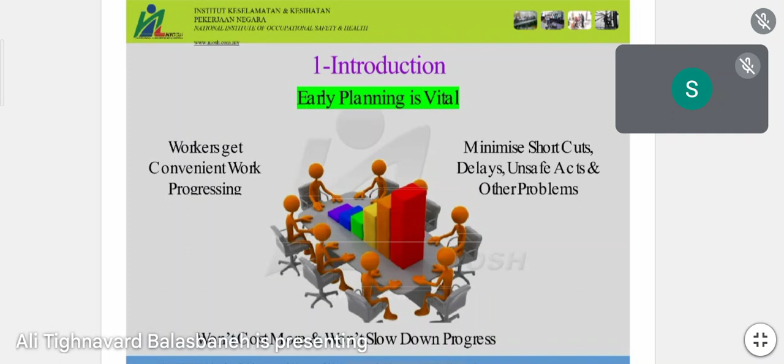Section 4. Okay. Do you have any class, not today, during the weekday that starts at 8 a.m., or no? All your classes start at 9? Yes, please, somebody answer the question. Don't be shy. It's simple. Mostly 8 a.m. Today, do you have any class at 8 a.m.? No, it is my first class. Oh, okay. Today class starts at 9. Thank you.

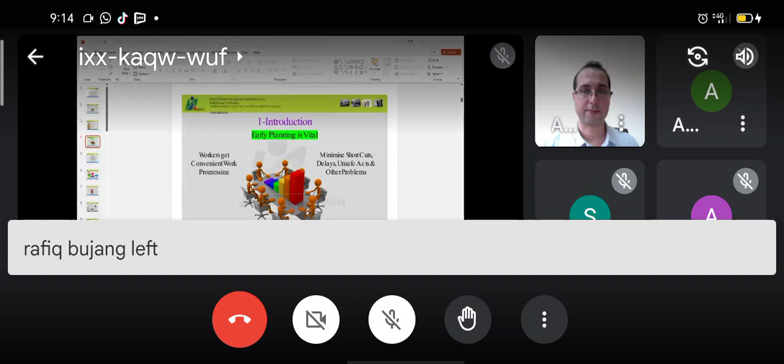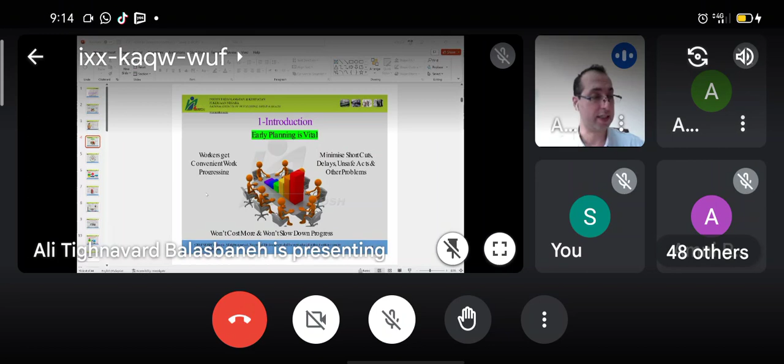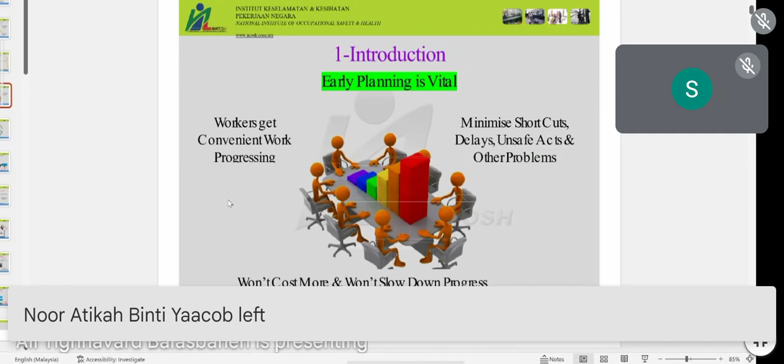So, for that interruption, let me start over and tell you what we are actually discussing. Well, if you review last week's notes, you already must know that we discussed some introduction of the organizations related to safety and health in the industry, in the workplace. And last week, we just had a slight view of safety in the construction industry.

So we tried to focus on the building because OSH is very general. It covers anybody who works, anybody called a worker. It doesn't matter if they work in the construction industry, petroleum, steel factory, or any other jobs. Those fields, like petroleum, are not really in the knowledge we study in the university, but building, yes, it is.

So therefore, we want to focus today on how OSH operates in our field, who is responsible, and at which stage we should apply the OSH rules or OSH instructions. This information can help you in your future job, so you can be more successful. And that's our purpose in attending this class.

We're not just here to review some PDF file or notes, get some marks and graduate. Either way, I believe all of you will graduate. But if you graduate with more knowledge, not just passing your topic, you have a higher chance to become a successful engineer, or whatever job or responsibility you have in the future. You can be more successful.

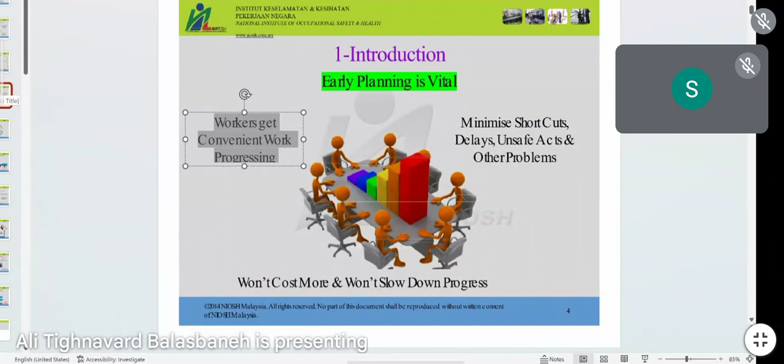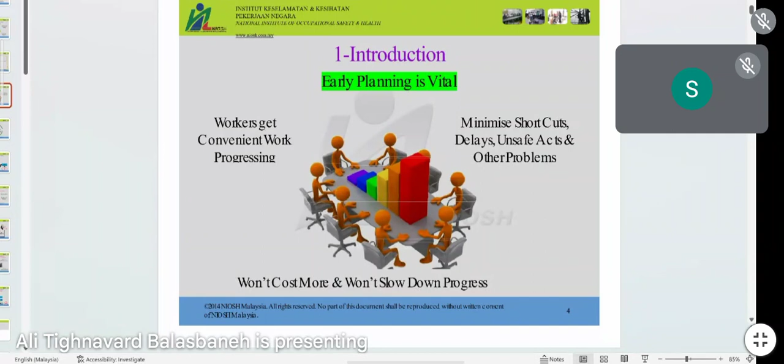There are some advantages when we apply these rules at the very early stage. First, the workers will have more convenient progress in their job, and it can minimize delays and unsafe activity. These are the advantages when you have early planning.

I just want you to think bigger. We don't make early planning only for OSH. For so many things we need early planning, okay? For example, for the procurement process. I hope you all know what the procurement process is since you passed the sustainability subject. Or for applying sustainability strategy, everything in the construction industry needs to be applied in early planning.

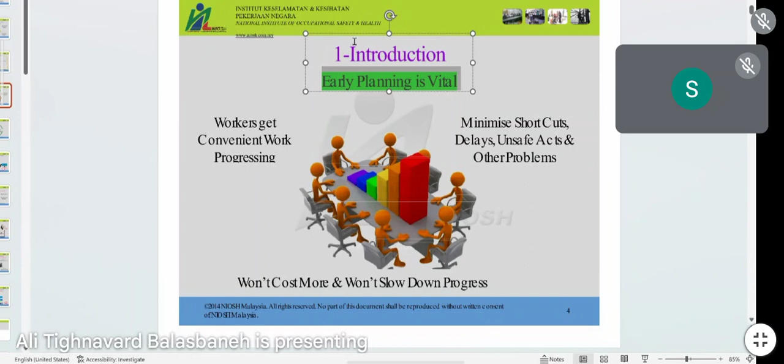So now I have a question for you. How do you think neglecting the OSH can affect time? Shouldn't we save time, or shouldn't we make the project faster because we are not following so many things that create barriers in our work? Like, if you apply some rules, it takes time. Why do we believe that if we don't follow the OSH, we can save time?

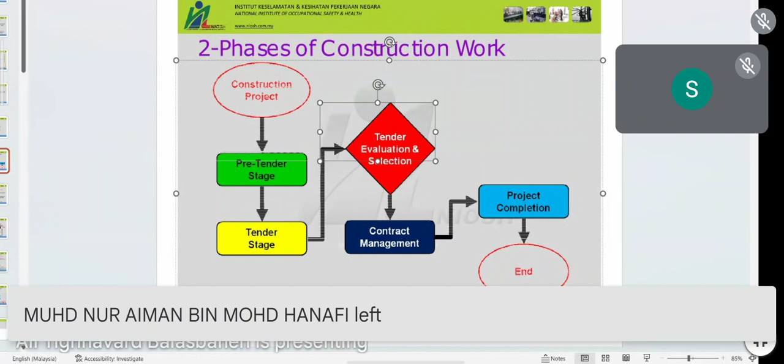We don't know, it depends on the city, how many companies exist in that city or country, and how interesting that project is for the company. Maybe 50 or 100 different companies are bidding for the tender. So what is our criteria to select that contractor? Because we need only one contractor, and it's very challenging to choose one out of 100.

Our criteria should be very specific, very clear, very vivid, and the people who make the decision to choose that contractor should be well experienced. We don't choose the contractor just because maybe we like the company name, right? That has nothing to do with the competency of the company. We don't choose the contractor because they have a branch in our neighborhood, we see each other and we are shy to choose somebody else. No, this is not the criteria. Our criteria should be professional.

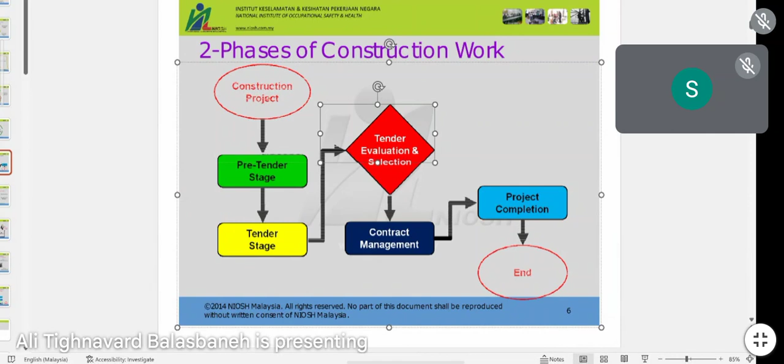Or the current project we have is very unique. You decided to apply many sustainable strategies. You check their background. Did they consider any sustainable strategy in previous projects? Are they familiar with sustainability or not? So many other items. So imagine we choose our contractor. Then we sign the official document with that contractor, and the process of construction is finished, done. So we can say the project is done.

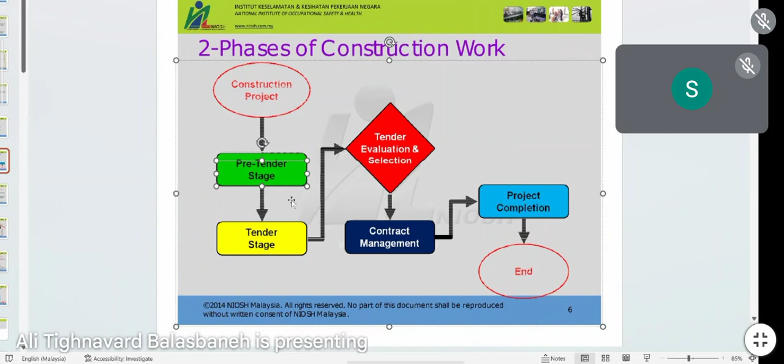But let's go back here. We want to prepare the tender. We need some documents before inviting the contractor to bid for the tender. What do we need here? We need all design information. We need appropriate drawings to show all the details of the building. What I mean by all the details, it must show exactly the size of every component of the building. If we design the balcony, it must show the dimension. For example, the dimension is 120 centimeters to 150 centimeters.

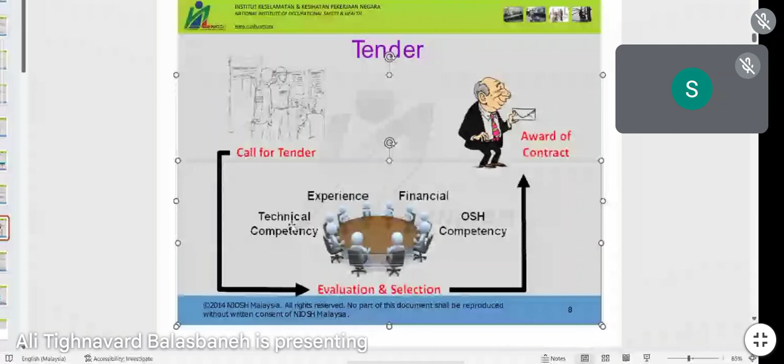Why do we need to deliver this information? The companies that want to be nominated as the contractor need to calculate exactly how much this project will cost. So we call for the tender, then we go through the evaluation process. You can see there are so many items that contribute to the decision, and one of them that we discuss today is OSH competency. And then we only award one contractor.

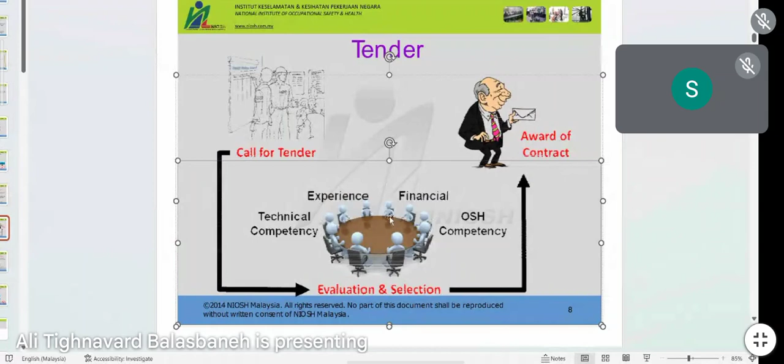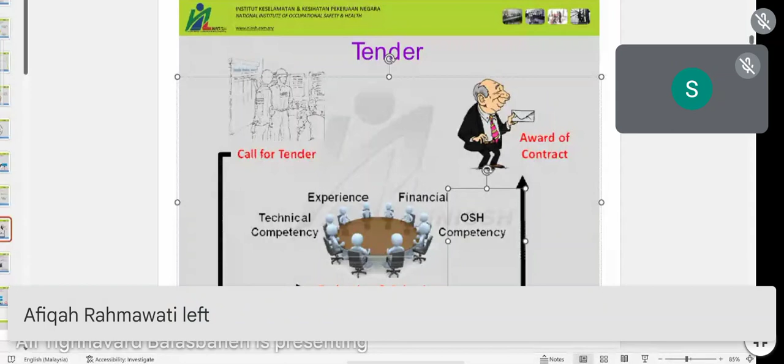So let's go back here. We check their experience, we check their financial background and many things. And also one of the items we need to check is how many accidents this company had in their previous projects. How many times accidents occurred while they were working as the contractor? That can show us as proof whether they are following the OSH rules or not. You see?

For every purpose we have, we need to look for that in the contractor candidate's background, because they will submit their CV. In the CV, they will mention how many successful projects they have previously done, the characterization of each project, and what they did in the previous project.

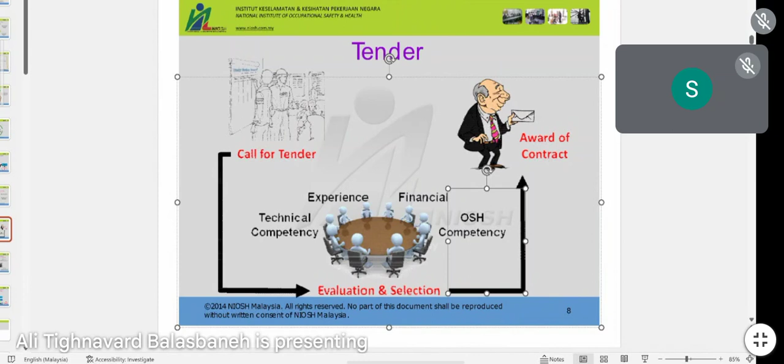So one of these criteria, why we came here, I want you to think bigger. Why did we come to check the phases of construction work? We want to understand where OSH is located here. We will study OSH for 14 weeks. So many hours we will spend. This is what we need, we have the right to know. Where is OSH located in my future job?

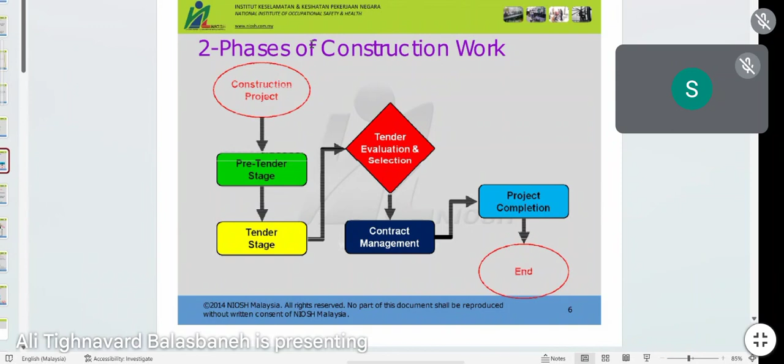If this is only a subject I need to pass and nobody cares about it in the future, then you're wasting your time. But I assure you it's not like that. Okay, so this answer is done: yes, I need it in the future. But the next thing you need to know is exactly at which stage, or in how many stages, I need to know about OSH. So remember that very well.

In the future, if you want to become a contractor, maybe not in the first year, maybe not in the first 5 years, but eventually, if you want to become a successful engineer, you become rich. One of the ways to become rich is to become a contractor. So remember that if you become a contractor, your safety background will be checked by the team, including the contractor, project manager, and so many people. So from the beginning, you must try to have projects with no accidents, or as few accidents as possible.

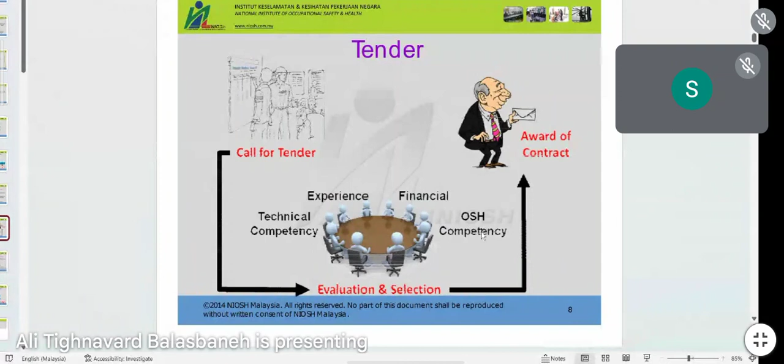Then the contract management, execution of work, this is the stage where the safety rules must be fulfilled completely, with supervision of the safety rules every single day. It's not enough if we claim, I'll check the safety once a month. This is wrong. Or you say, I will check the safety once a week.

This is also wrong, because there are so many activities ongoing on the project. Some of them might have a low risk of accident today. Other activities might have a medium risk of accident today. If you check once a week, in the next 4 days, the one with a medium risk might already turn highly risky, and an accident happens before you have a chance to check again.

So, what is the conclusion? The monitoring for safety should be every day, and you will have a list of all the work, and you will take notes. Okay, this task has low risk. Another task has high risk. Then for the one with high risk, you should have an immediate solution to rectify that risk.

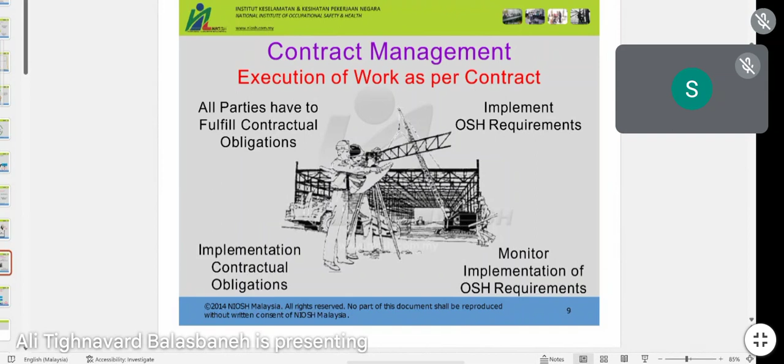Now let's continue. The contract management. There are some typical activities that we can find in any work or project. Let's see. Preliminary works, which we will discuss later, substructure and superstructure, M&E installation, and finishing of the project. Finishing means completion and end.

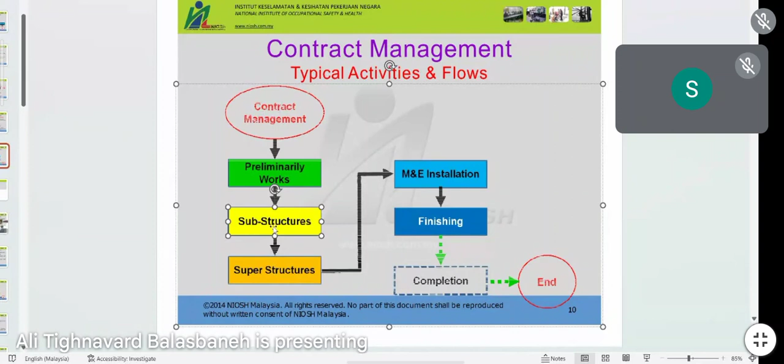So, one question I have for you. What is the substructure, and what is the difference between sub and superstructure? Anybody have an answer? Please share with the class. Substructure is from the foundation and below. Superstructure is above the foundation until the very top floor and roof. Okay, thank you, Zahro. Very good.

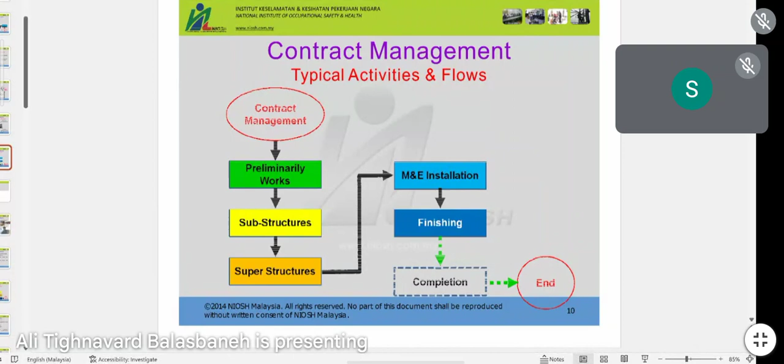So, let's check together in one tutorial and see the full difference between these two. InsyaAllah.

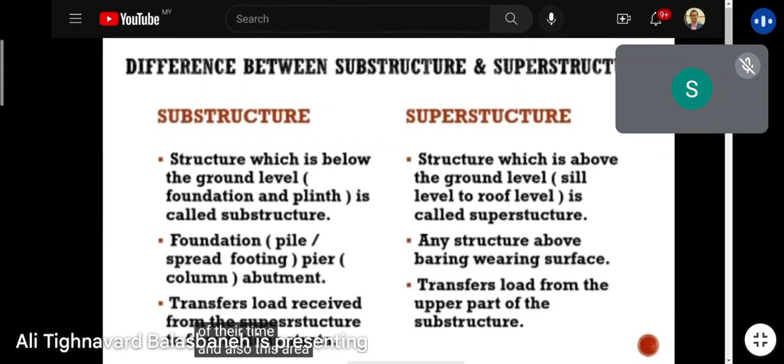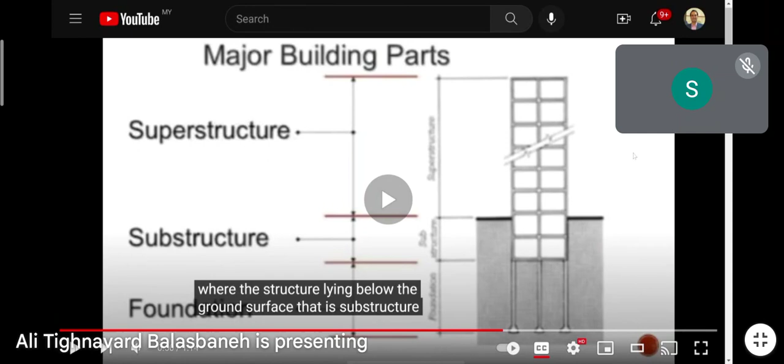And the structure lying above the ground surface, that is superstructure. The last one is examples of substructure and superstructure. The footing. Okay.

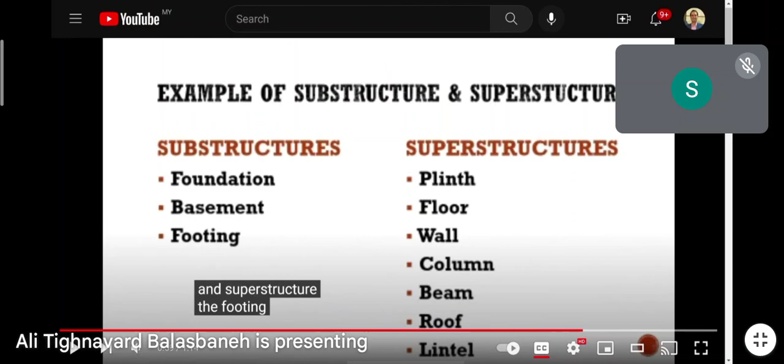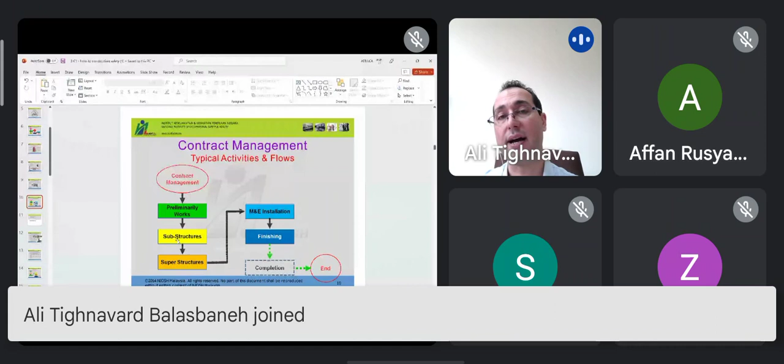So why? Some of you might already know the difference between substructure and superstructure, but this is not what we want to discuss today. We want to know why we have to separate substructure and superstructure in the OSH topic. The answer is very simple.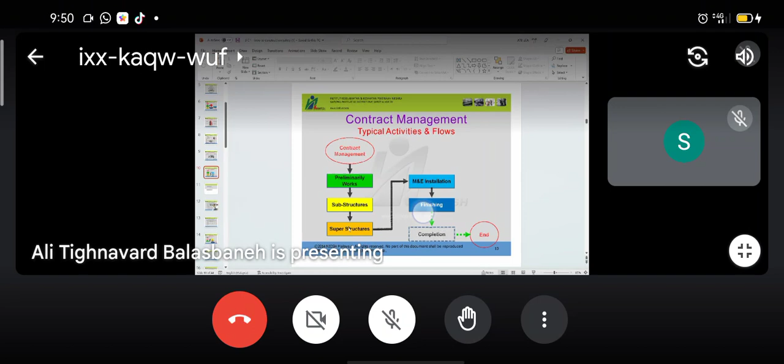The procedures to apply safety on the substructure are different from the safety procedures that we apply during the superstructure. This needs to be considered carefully during the project. We cannot finish a 20-story building with the preliminary safety rules that we applied for the substructure until the end of the project, because when we enter the superstructure stage, it requires another strategy to apply safety.

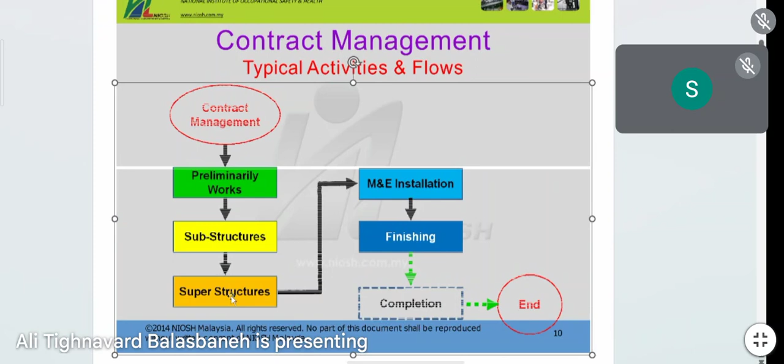So there are differences in the contract management. There is different equipment and machinery that needs to be used, such as the excavator. This is what we call an excavator. Piling rigs. We just saw the piling in the video tutorial, but this is the machinery. And the bar bending machine.

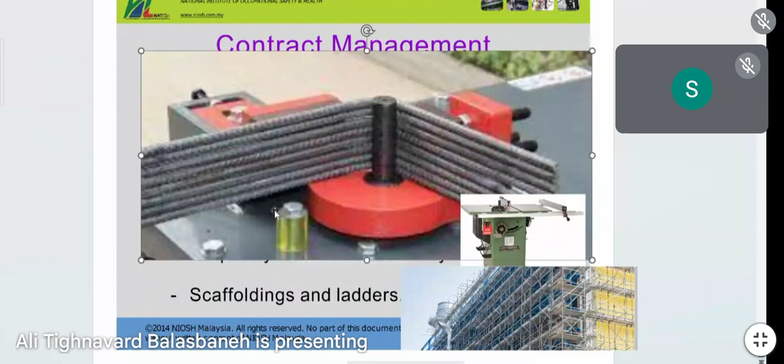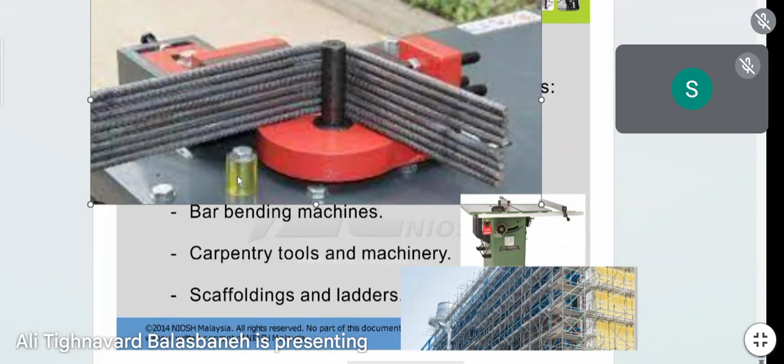Long time ago when I was very young, I remember I saw one project. They did not have this machine, and they bent the bars physically by human workers. That could be done in a small project, but in a heavy, big project, they must have this equipment. Carpentry tools, and scaffolding.

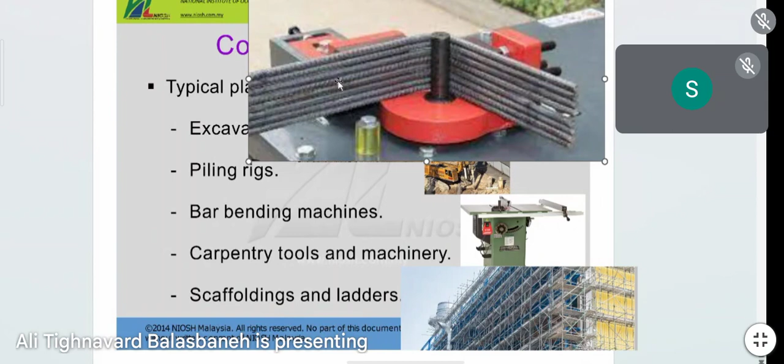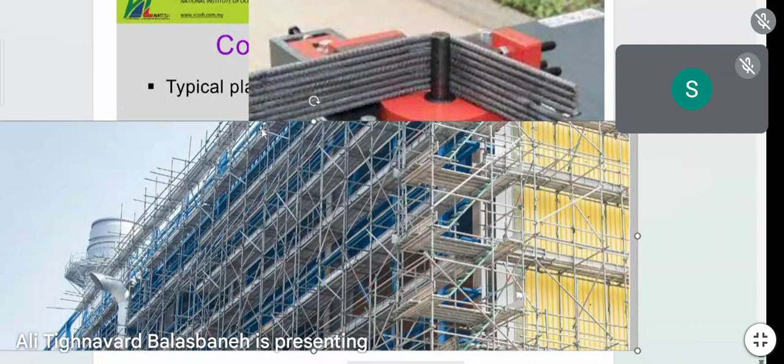So, you might already know what the excavator or other things here are. The purpose of this slide is to make you familiar. For different equipment, sometimes we need different safety procedures. For example, bar bending mostly contributes to injuries to the worker's hand. But scaffolding doesn't only cause injury to the hand. Some workers fall down from the top story, and they have other injuries waiting for them.

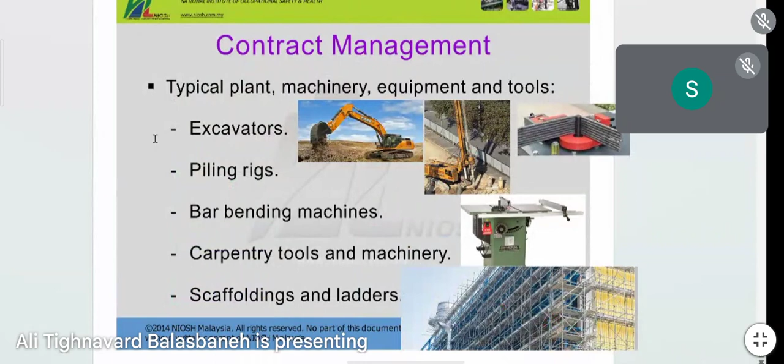Other items you can see here: crane, batching plant, concrete mixer. The rules apply for all of them. Typical activities and their flow. So imagine we apply all the OSH rules and the project is finished. Then we enter another stage, which is testing, handover, the defect liability period, and close out. This liability is related to the stage where you, or whoever is the contractor, must rectify any problem that appears in the project.

For this liability, I cannot tell you exactly what the duration is. Maybe 6 months, maybe 2 years. Why can't I tell you? Because it depends on the contract. But regardless of the duration, now you must know what this defect liability period is.

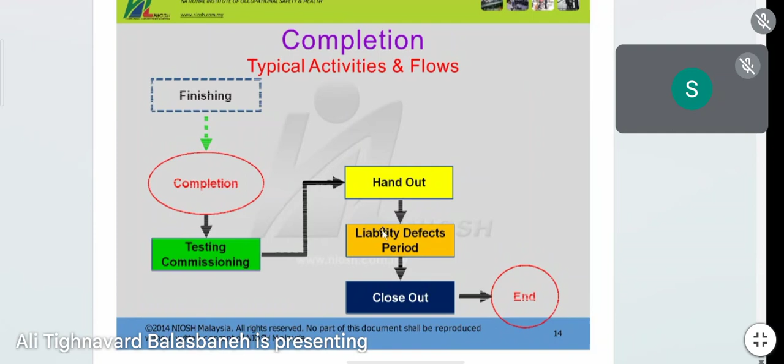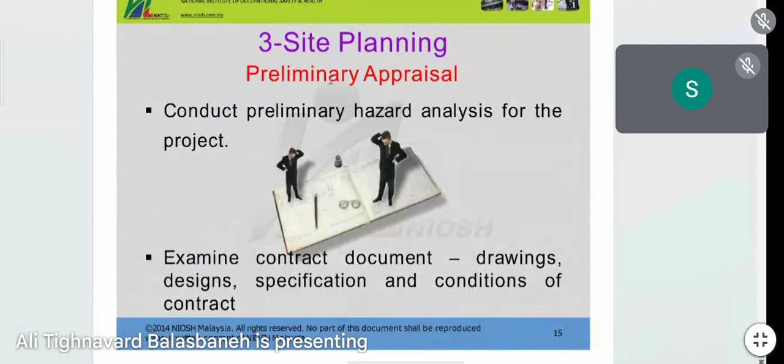Preliminary appraisal: conduct the preliminary hazard analysis for the project. When they do that, examine the contract documents, drawings, design, specification and conditions of the contract. Site planning, before I forget, is the third topic that we discuss today. There are so many issues related to site planning, as you can see here.

For example, the operation comes with a high risk. You need storage for keeping the material safe, not only from the weather condition, for example, rain can spoil the cement or any equipment and machinery, but it also needs to be safe from stealing. Requirements for site security, logical sequence of work, and other things like capacity of plant and equipment.

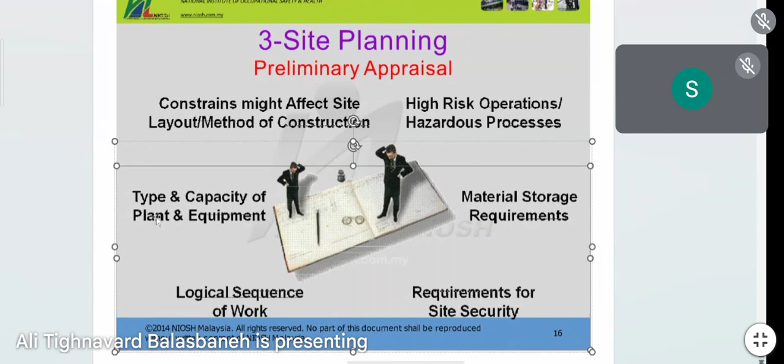So, when we talk about site planning, imagine this is your site plan and see yourself working in the future. The area where the building is constructed is just this square. Take a look here. But around this building, you have a big space that is considered the construction site. Inside this construction site is the space you need to handle all your work or anything needed to construct this project.

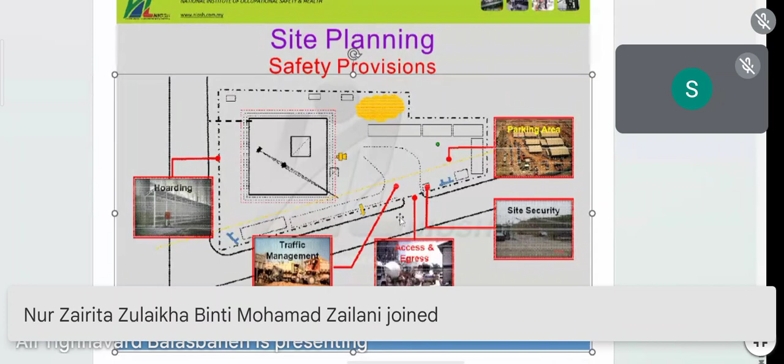Some of these items are already mentioned here. For example, the parking area. Take a look here. The red dot shows where the engineer, project manager, owner, or whoever wants to visit the site can park the car. This is the gate entrance. And this is the main street. Next to the entrance is the place where site security should be located.

You might say, yes, we all know that, but I need to repeat it because this one might be easy, but others might be a little confusing. For example, if we locate the car park here, it's a completely wrong location, because after the entrance, if the car passes from here, it's vulnerable to so many accidents because it's next to the building. It should always be somewhat far from the building. And site security should always be next to the entrance, not here.

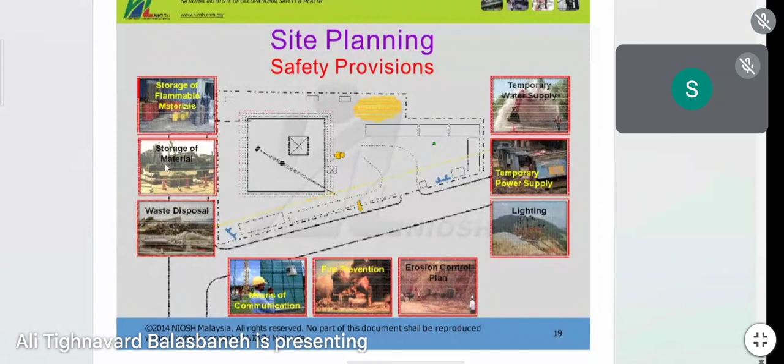Traffic management, cranes here, because this is where we need scaffolding around the building. Sorry, the net should be here. I will show you in the next slide, but we just mentioned what we need: the safety hoist, temporary water supply, temporary power supply needed for the project, and the other things you can see here, the storage of flammable materials, sorry, the storage for material, and the waste disposal place.

You remember in the sustainability subject, we mentioned 3% to 8% of the material used for construction always goes to waste in Malaysia, and we end up with like 20, 50 million ringgit every year. Every building has some waste material. That could be anything. So therefore, we need to allocate a specific place for the waste material.

This allocation will be someday in your job. You're going to be a person who allocates a different place for all these items that we saw in the last few slides on the site. So,

I'm sorry, I'm not really feeling well today.

There is need for a canteen where workers can sit there and makan, okay? There is need for a place for the drinking water, which should be there inside, for the sanitary washing room, and the other things you can see here. So,

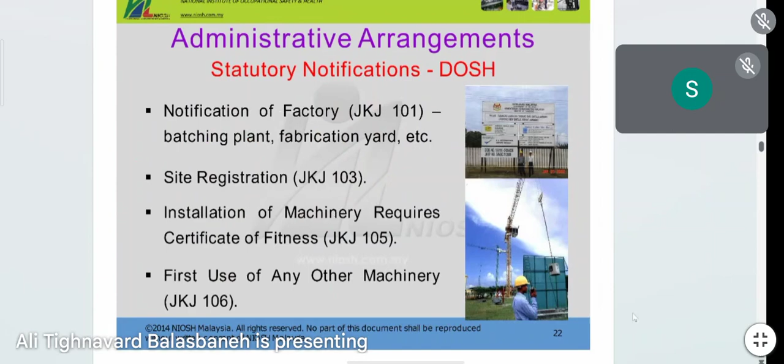When we make this decision to allocate every item in the project, it should be prior to the starting of the work. What does it mean? It means all these items that we decide to put on the project, the decision does not come 2 months after physical activity started, right?

It should make a decision before even somebody steps on the work. The decision should be prior, before, maybe 1 month, 2 months, 3 months before anything started on the site. So, the conclusion is we cannot postpone after the project starts. Another conclusion is we cannot

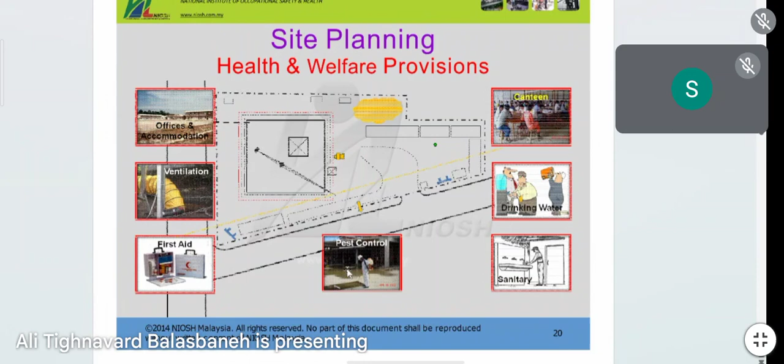postpone and see, for example, where workers decide they want to dump the waste. We cannot let, for example, the temporary power supply or water supply just be decided by the transportation. The lorry who transfers just leaves it somewhere. When the water or power supply arrives on the site, you must show exactly to the lorry driver or the crane to set up in the specific place. Means the decision should be taken in advance.

We cannot leave it for the last minute or leave it for others to decide. Please decide to put the waste disposal somewhere. You are the one who makes the decision. Means the job you do is important.

I want to give you an example. You remember in the previous slide we showed you this is the car park, right? This was the car park here. I think you can see the mouse I showed. So imagine if you bring the waste disposal here after the car park. This will be considered as a wrong decision by you or your team.

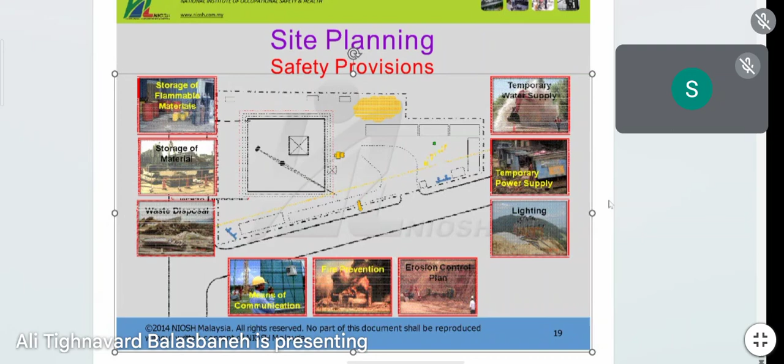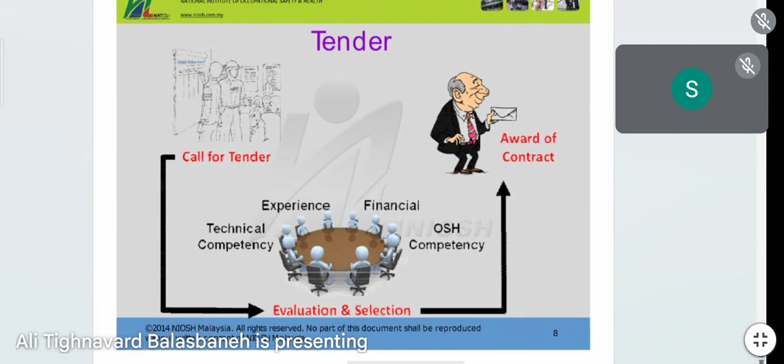So we have a contractor, right, on the site. Where do we get the contractor? This process we just reviewed. We award the contract, and we got only one contractor in our project. But it doesn't mean the project will be handled by one. We have subcontractors, not one subcontractor. We have many subcontractors in our project.

The knowledge of OSH is two-way between contractor and subcontractor. Because, firstly, there is the duration of the subcontractor. Working on the project is not contracted like the main contractor. The main contractor is in the project from the moment he is awarded until the project finishes. But some subcontractors are in the project for a short time.

Like what? For example, the subcontractor who is responsible for installing windows and all door gates in the project. The duration of that subcontractor's workers is maybe just 2 weeks. And then maybe another subcontractor arrives. Or before this, maybe the subcontractor of the painting work is there.

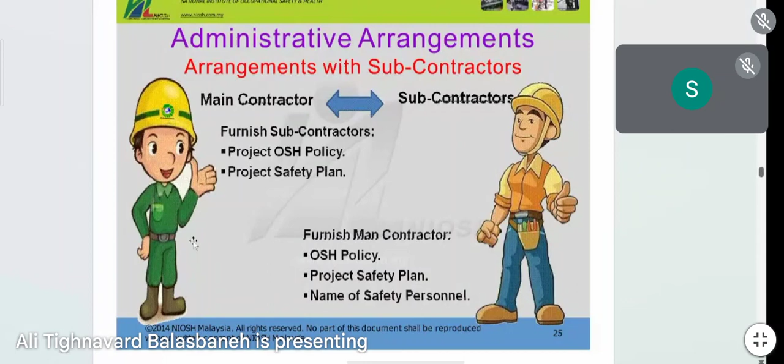This is the main issue we need to know. So arrangement with subcontractor, early installation of means of communication, arrangements for material storage, procedures for dealing with common access, and disputes if they happen during the work, requirement, procedures for PTW system, provision of firefighting equipment, and there are so many other things that need to be considered between both subcontractor and the contractor in any project.

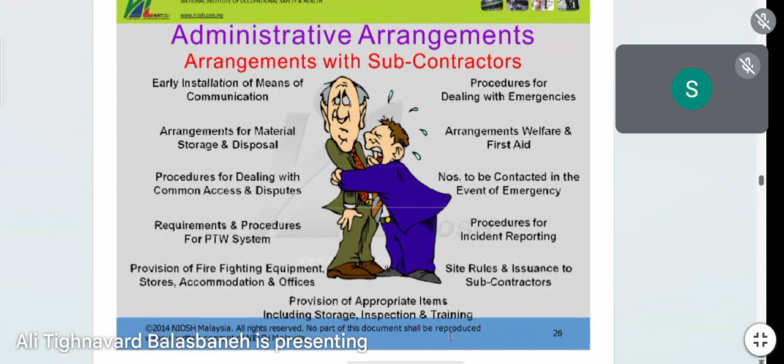Okay, and in order to follow these issues, you can see there are so many signboards that can be installed in different corners of the project. You might already have seen some of them, right?

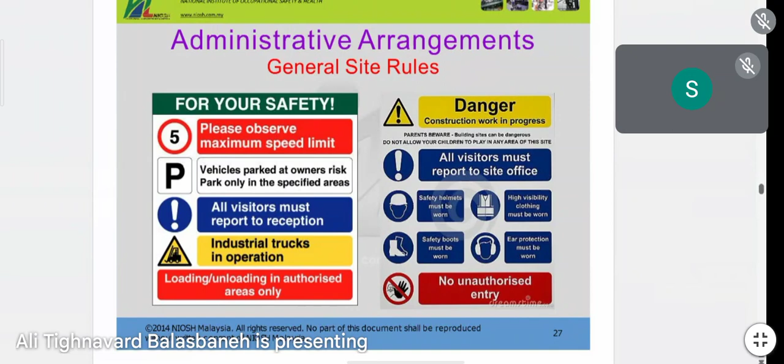So, site security, we just reviewed the picture a few slides back. You can see here there are some rules for the site security because the site security is the entrance of any project, and inside this site we call it a dangerous place. Not dangerous, or we call it hazard. There are hazards that exist in any construction industry.

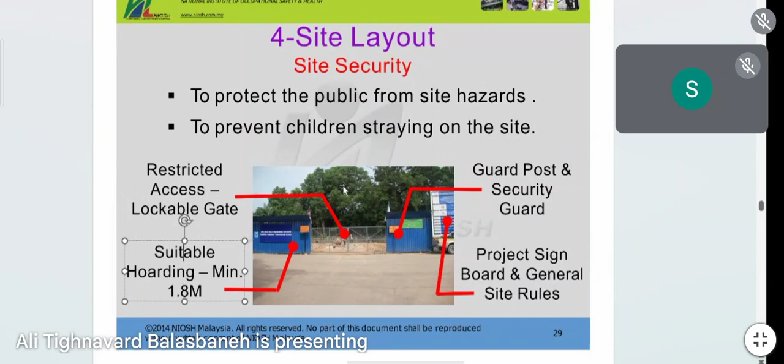So this main gate will separate the site from outside. So it needs to be monitored who enters and who exits. And for the exit, it should have a different exit for the workers who need to leave the place, and also for traffic control, because inside the site, where we want to build a building, normally it is a small place, and we cannot expect two lorries to enter at the same time, or 3 or 4 lorries to enter the site at the same time.

That's why the traffic should be controlled, because when the lorry enters, it wants to deliver some material which takes time and takes space to put those materials out of the truck. So it needs to wait. If there are 2 lorries entering at the same time, the second one must wait until the first one is done with its job and exits. So you can see here we have pedestrian and another passage for the machinery.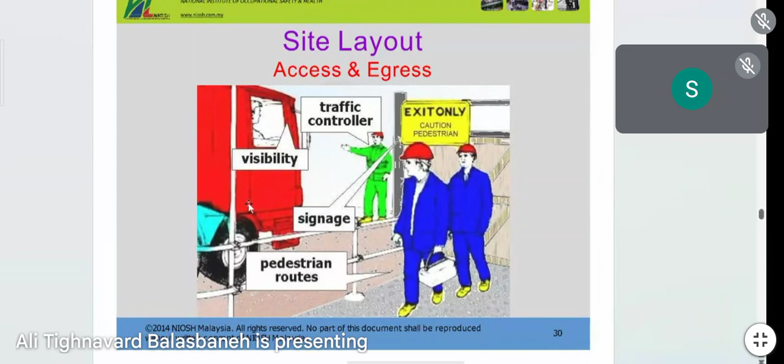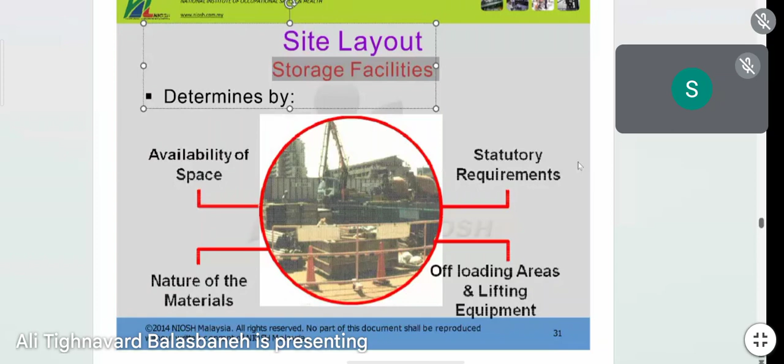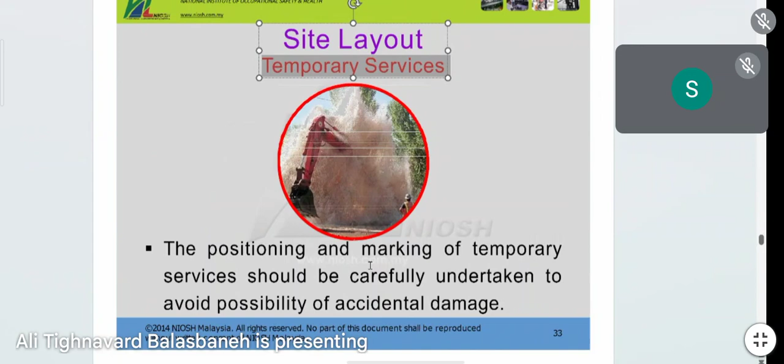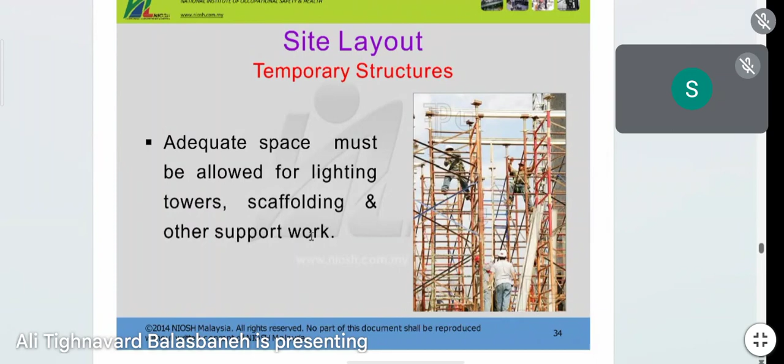The storage facility is another important place in any construction site. Lifting equipment, temporary service. You see what is mentioned here, the positioning and marking of temporary service should be carefully undertaken to avoid any accident, any incident, which causes damage to our project. Scaffolding, tower, lighting tower, and other items should be adequately installed in the right place. Site waste management.

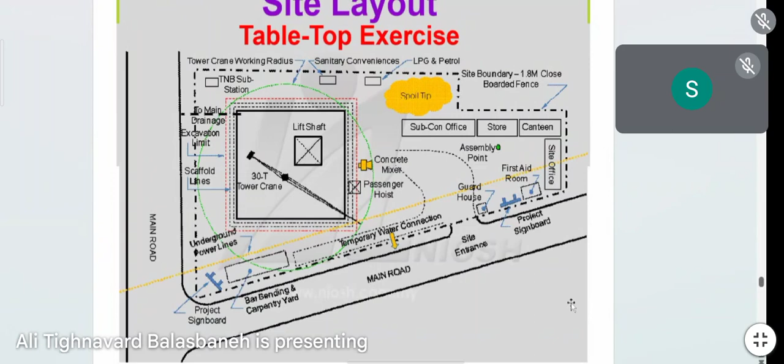And let's go to our conclusion. Take a look here. Site office is here. Site office is the place where the engineer, project manager, whoever is working on the project, supervises the project; the site manager can sit there, make decisions there, have a meeting there. Then we have canteen, a store, subcontractor office. You see, the subcontractor has their own office. So the dimension, the size of this office, is not necessarily to be followed from this picture. Okay, it's just a schematic model.

First aid room will be designed here, the setup here, the guardhouse here, temporary water. You can see it's close to everywhere, close to the subcontractor office, but mostly close to be accessible by the workers. Also, the sanitary washing room here, tower crane working radius is here. What else do we have here? This is the main road. And you see these dots are for different things, for example, for excavation limitation, for scaffold lines, meaning the scaffold should not be built beyond this line. That's how we create site layout for a project.

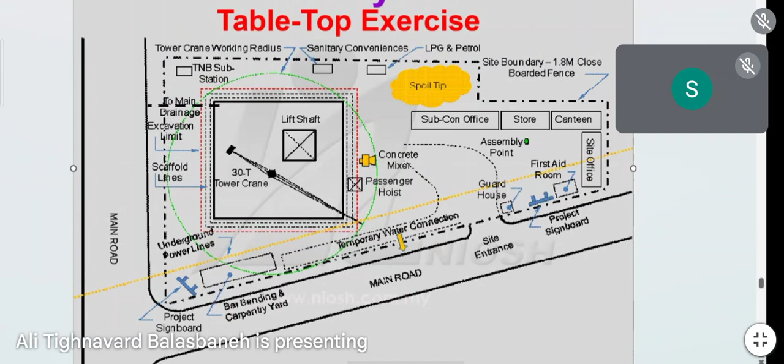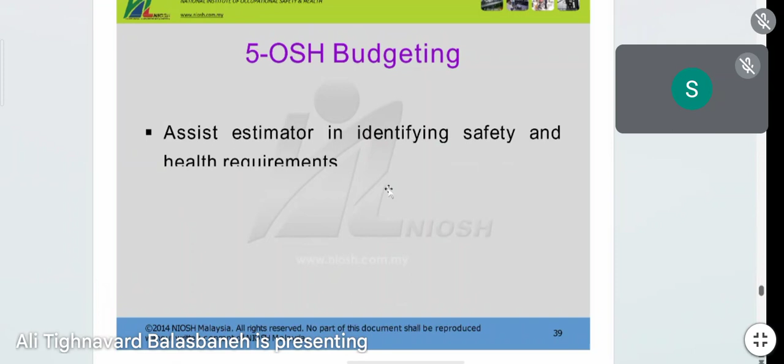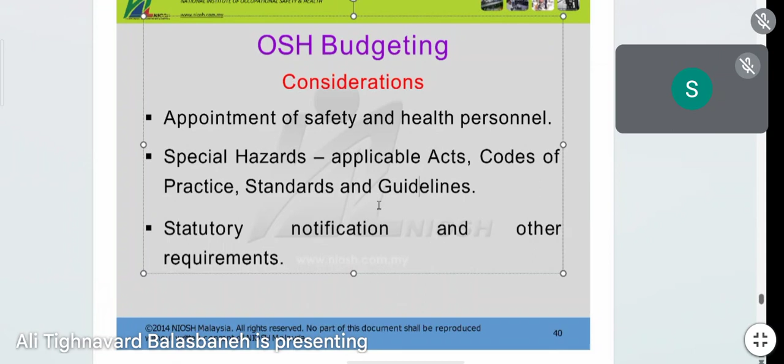The last issue we discuss today is the OSH budgeting. We need to estimate and identify the safety and health requirements which need to be applied in the project. And there are some considerations. For example, as you can read here, appointment of the safety and health personnel. There are some special hazards, if applicable, acts, the code of practice, standards, and there are some guidelines. Provision of the means of access and the other items you can read later.

And in the summary, for what we discussed today, comprehensive planning is necessary before the physical activity starts on site to achieve the best safety and health practice. I repeat again. We need a very big plan, a very comprehensive plan before the project starts. The project has started already by starting the physical activity. We need a comprehensive plan before the physical activity such as excavation starts. That's the way we can achieve the best practice for safety.

Second summary, preliminary hazard analysis should be conducted to find out the project safety needs. So what we do here, secondly, we do analysis. Firstly, we need a comprehensive plan. These two items, if we follow up properly, we get the best result for safety. Preliminary appraisal, administrative arrangement, budgeting and site layout are the processes that need to be handled.